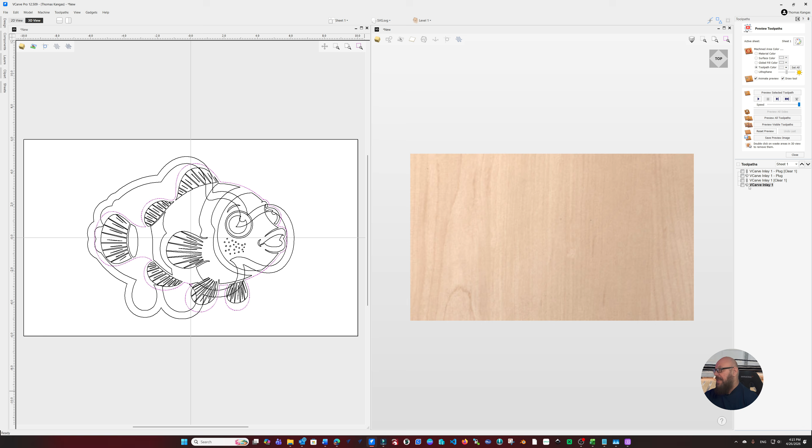Our easiest method of fixing this is to do a little bit of pre-planning before we ever lay down our first actual Vcarve inlay. So I'm going to go ahead and delete these. And then I need to go back. It looks like I need to reselect them, and we'll delete those vectors one at a time. So my method for fixing this is to do a little bit of pre-planning. And we will go into our sheets.

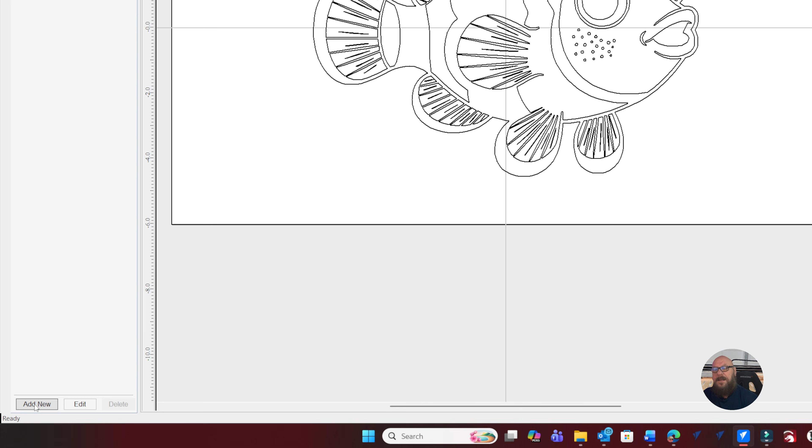And first off, we will rename our top sheet. Say we were going to use walnut as a board material, so we can rename this sheet walnut board. And there's our 20 by 12 by 2 inch thick. The next thing we want to do is we want to add a new sheet. And in this, we're going to call this maple. Edit the sheet. And in this case, we'll go with our 12 by 12. And we'll go ahead and use maple as our appearance. And so this now gives us two different sheets.

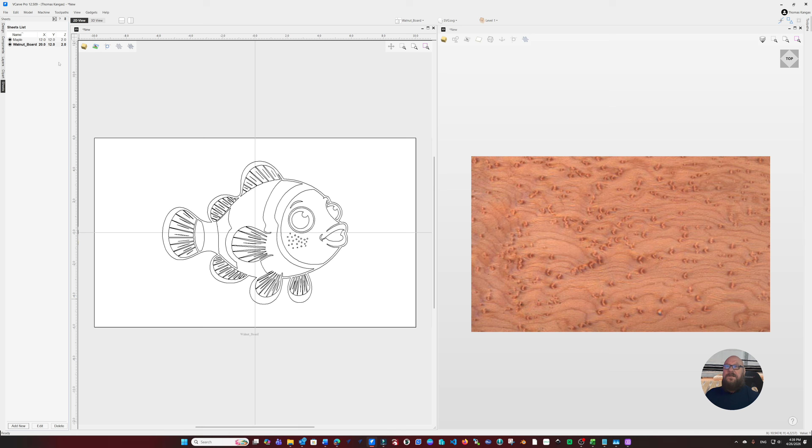Let's go ahead and edit our walnut board so that we can change to walnut for our material, just to keep things a little simpler. Now we can go in and do a split view, and you'll see up in the top here we have a walnut board and we have a maple sheet that is 12 by 12. So from here we can start creating our Vcarve inlay toolpaths.

So let's switch over and first select a vector that we're going to create. Click on our Vcarve inlay toolpath. You'll fill in your appropriate pocket depth, glue gap, and surface gap for the bit you intend to use. What we're going to do here is a little bit different. We're going to make our plug destination sheet our maple board, and we're going to give it a vector offset of about 1/4 of an inch, or about, I think that's like 6.35 millimeters.

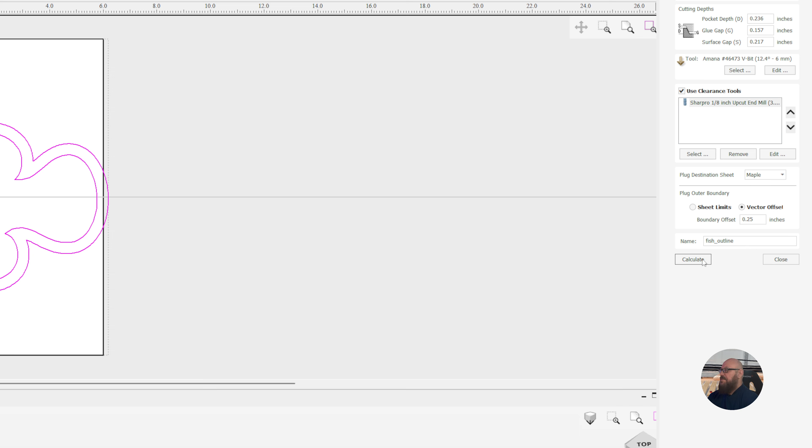Give our inlay a name. We'll call this fish outline. And now when we calculate it, we see that we have inlay for our plug on the maple sheet where we wanted it. And if we calculate these out and run the preview toolpaths, we see that we have our plug side. And if we switch to our pocket side, we can also see our toolpaths here.

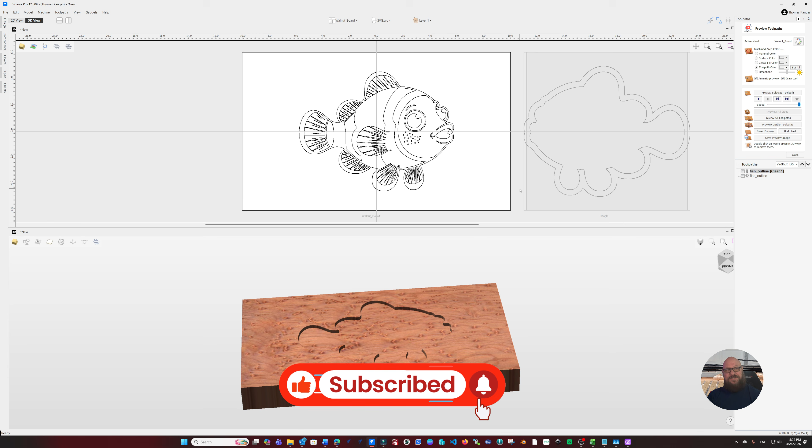I always appreciate that. Not only can you use the sheets for the VCarve inlay toolpaths, you can also use them for the traditional Zank method. There are a couple extra steps to perform, but it's still a good option to organize your inlay pocket and plug toolpaths. So the first thing we need to do when we're using a Zank or traditional VCarve inlay is that we're going to need to select our vector, right-click on it, copy it to, and select sheet, and the sheet that we want to copy to.

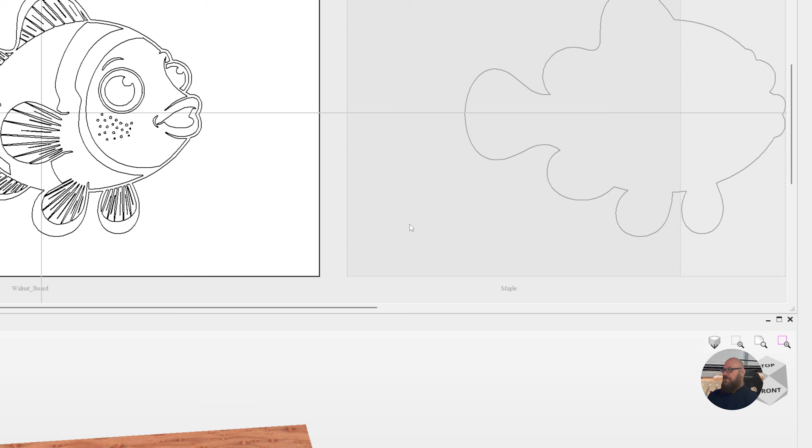Then we need to move over to that sheet, highlight our vector, press F9 to center it. Then we're going to go to the mirror selected objects, and we're going to flip that horizontally, then highlight the vector, and then we'll use an offset, and we're going to go outward, and we're going to go 0.25 inches, or basically a 1/4 inch. Offset that, and that's our two vectors. Switch back over to our walnut board, and we can begin creating our toolpath.

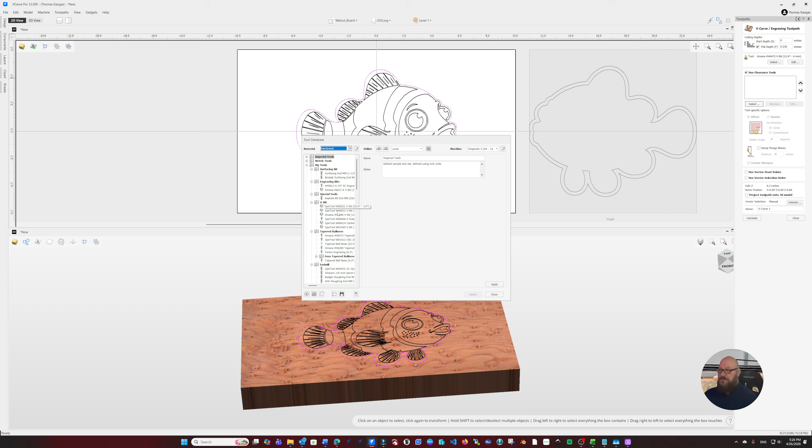So now let's create a regular V-Carve inlay toolpath, and we're going to go with a start depth of 0, a flat depth of 0.236. Need to select my bit. Go with our Amana 46473 12.4 degree V bit. And because this is going to be a large vector, we're also going to use a clearance tool. And for that, I will use my Sharpro 1/8 inch upcut end mill. And we will call this fish underscore outline. And we will calculate that out. And now if we preview our toolpaths, we'll see that we get our pocket.

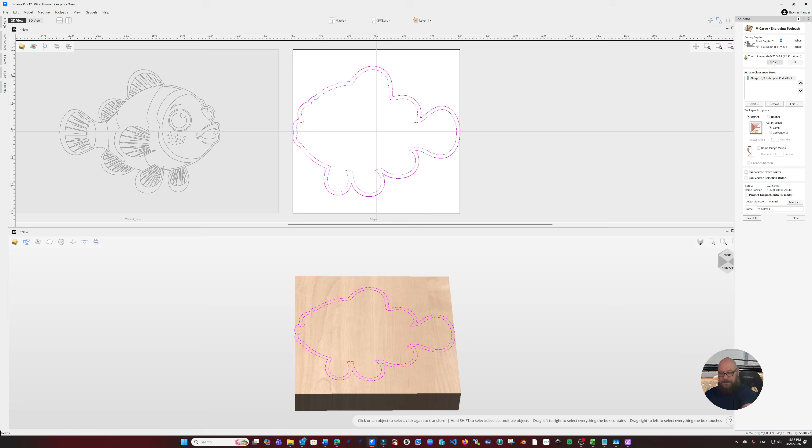Now we can move over to our maple sheet, and we're going to select both vectors and do our V-Carve engraving path. This time we're going to change up our start depth and flat depth to match the tool. Will be 0.222 inches. Again, we'll call this fish outline plug. And when we calculate that out, we get our toolpaths for our plug. When we preview the toolpaths, see we have a nice clean plug.

So there you have it. Paul, I want to thank you so much for submitting your question, and I really hope that this video helps to clarify things. It's always a good idea, whether using V-Carve inlay toolpaths or the traditional, also referred to as Zank method, that you have a plan for how you intend to separate your pocket and plug toolpaths. The biggest advantage to sheets is that you don't have to make larger plugs to match the material size of your plug inlays. You need only to get the measurement of your vectors and create plug materials that are a little larger to account for the offset.